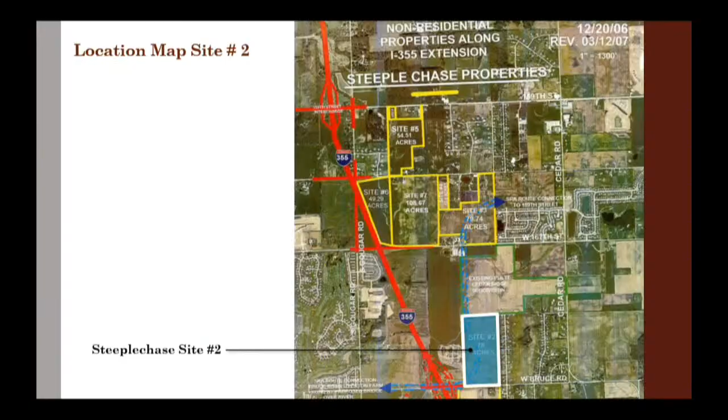The item went before the Plan and Zoning Commission at their regularly scheduled meeting on October 8th, 2024. Questions came up from the public related to the size of the lots and the interior of the development having a different character than the neighboring residential lots. I'm going to pull this up.

Two density concerns: the area has a history of major flooding issues, and one resident claimed the water table is abnormally high in this location, with substantial flooding occurring often. There was concern for additional cars on Bruce Road and at the intersections at Cedar and Gougar, and residents asked for more open space and had questions about the number of school-aged children being introduced into the area schools and district. A commission member also had questions related to the price points of the housing and the zoning, getting confirmation on that, and the importance of housing diversity to people interested in coming into town.

Five of the seven commissioners were present and voted 3-2 to recommend approval of the concept plan. Subsequent to the Plan Zoning Commission meeting, staff identified a series of answers to questions asked either by residents, by commissioners, or by emails we got from various residents after the meeting. I'm going to go through a number of those components, but I want to walk through the plan itself that you see on your screen.

A lot of the numbers are on the left side. The site data shows the number of units for each type of property. So the single family, what we have termed small lot, which would be the 43 by 120 properties, there are 106 of those on this plan. Then the single family 65-foot wide lots by 120 and 75-foot by 120.

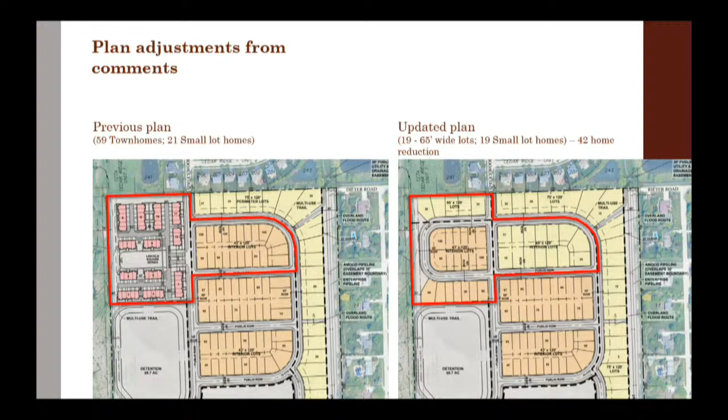There were already all single-family lots along the east edge, so there weren't any modifications related to that, with the exception of one minor modification that added 2 homes along the south section, south of where the Ron Court right-of-way is. Those changed from 75-foot wide lots to 65-foot wide lots, so that was an addition of 2.

But again, the home type between the 65 and the 75 foot is no different. It's the exact same home that you would find on both. And again, you can drive through Silo Bend, and both of those home lot sizes are in Silo Bend.

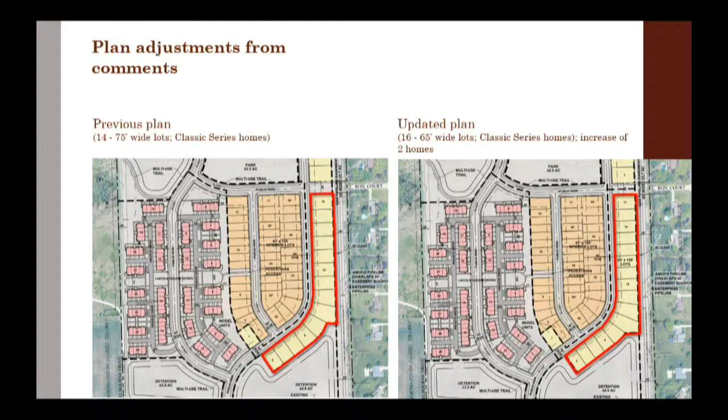Some other contextual information, the zoning I mentioned before, the 2009 annexation agreement allowed for the 3 different zoning categories tied to an active adult community. There was the reversion provision that I went over before, that if a successor owner, which is what MI Homes would be, proposes a plan that's not specific to an active adult senior living, the property would be considered as an existing R1 zoning property.

Plan comparisons: what you see on your screen is the original Steeplechase Site 2 plan. This one had 61 or 81 6-unit townhomes, those are in the blue on the left side of the plan. They had 88 duplex units, primarily in the middle of the plan, and 97 small lot detached single family, which is throughout the remainder of the plan. Total unit count of 266 units.

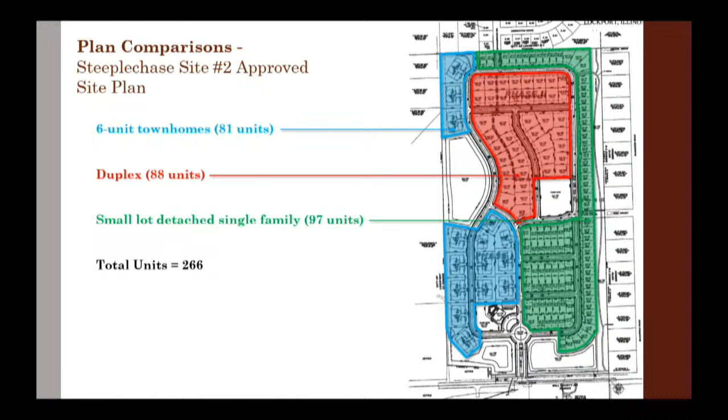Park is generally in the same area as what we have it on the Sadie Ridge plan. It's about 2 times the size on the Sadie Ridge plan than what it was on the original Site 2 plan. Just as a comparison as far as things that were included in it, both plans include small lot detached single family homes.

The square footage sizes are shown on your screen. Both plans include townhomes of up to 6 units per building. Both plans include bike paths and connections to Cedar Ridge's paths, although the 2024 plan includes about 2 times as many trails in it as what the original plan did.

Both plans include a roughly 2.5 acre park that would be accessible by both the Homer Glen residents to the east as well as Cedar Ridge residents to the north. Both plans include a right-of-way connection but no street to Ron Court in case the school site develops.

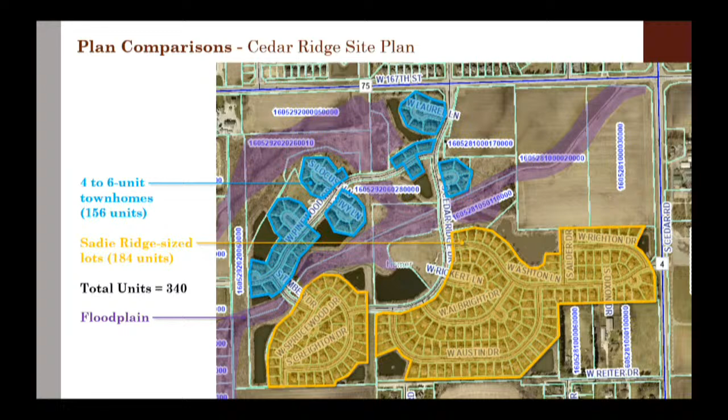These are some comparable architecture examples, and I want to be clear on the architecture components of it. The council does not, as a part of this resolution, approve architecture as a component of it. We only approve the concept site plan. So these are comparable to show what the intention is to build on something like this.

Once we get through a concept plan at a staff level, taking comments from city council as well as plan commission members and integrating our design guidelines and material standards, we go through with the developer and develop a number of different ways to approach the architecture. As you might imagine, we've gone through that on a fairly significant basis in Silo Bend for the classic home series, which is what you see on your screen primarily. We did a fair amount of work on that. It had 6 different model types with 6 different elevations each, offering 36 different ways to approach the architecture. So that was included.

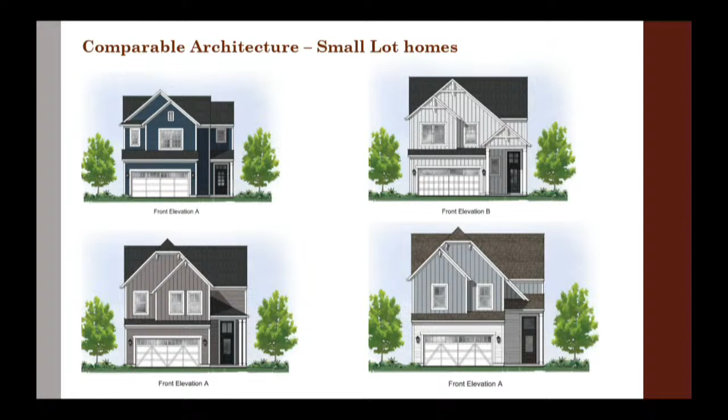The small lot homes, these are shown as a comparable image to what could be there for the small lot home. And for the Lincoln Square townhomes, this is a comparable image for what could be done there. But again, all of this will get filtered through both your comments as well as our design guidelines, design standards, and exterior material standards that we have codified.

Related to the schools, note that this particular property, the Sadie Ridge property, was included in the demographic forecast developed by McKibben Demographic Research Associates in 2021 that LTHS did on behalf of the feeder districts and themselves. What you see outlined in red are the student counts, projected counts for both Homer 33C as well as 205.

What you'll notice primarily in 205 is there is a relatively significant decline of students that is projected, bottoming out in about 2028, 2029, down to about 3,304 students. As I've talked with Dr. McBride and some other senior staff members at LTHS, these trends are tracking nearly exactly to the person what was forecast at the time. So our actuals are turning out to be real.

I also had a conversation with the superintendent at 33C to get a better understanding of whether their numbers are also tracking with these. Their numbers are, for sure, so they are seeing their student populations decline slightly, but what they wanted to make sure I noted for all of you is that their student type has changed. Through the pandemic, and it's happened at the high school as well, there have been a lot more IEP special needs kids that have come out of the pandemic because of all the stuff that happened with that.

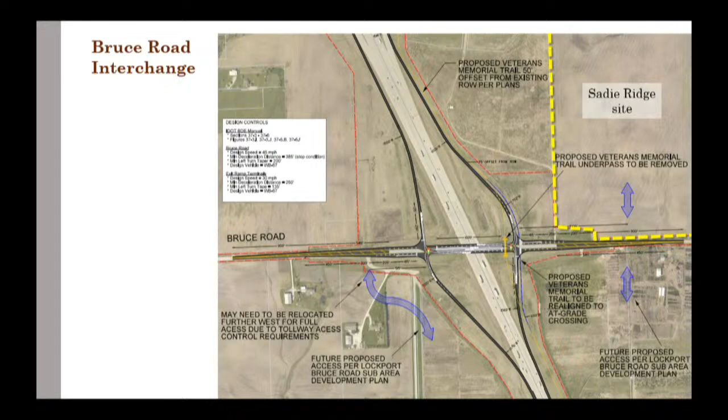As I pointed out on the earlier plan, that middle alignment was an effort that had gone pretty far down the road, not full design documents, but they were advancing it. As I've talked with some of you, think back—we didn't even have the tollway 15 years ago. It was non-existent, and Gauger Road was still a chip and seal two-lane road, and so was 159th Street. So if you think about the pace of change in our infrastructure since that point and the dramatic changes that's made, this is certainly something that, although not funded currently, could be in the future—whether it's part of another development proximate to this, or part of a new bridge plan that resurrects itself since it was put on the shelf a couple years ago.

I wanted to put that out there so everybody had a sense of what that looked like. From a traffic standpoint, a traffic study is not required during the concept plan phase of the project, but it will be a significant part of the final development plan phase.

We do that for all of our projects, and all traffic studies are reviewed by a third-party consultant that reviews it on the city's behalf, not on the developer's behalf.

We heard a lot from the residents as well as the plan commissioners related to the Gauger-Bruce Road intersection, as well as the Cedar Road-Bruce Road intersection. Working with Will County, we will be a major part of that effort. We worked with Will County for the Silo Bend Division Street because they have jurisdiction over Division Street as well—that's why you see the dedicated left turn lanes at the entrance to Silo Bend, and the deceleration lanes at the entrance to Silo Bend. All of those components will certainly be taken into consideration and studied in great detail if this is approved to move forward into that next phase.

From a soil standpoint, we also heard the residents who live and look at the dirt every day. The developer, as is typical, isn't going to do soil borings, depth studies, and soil quality studies until they have some level of confidence that they should move into that phase and expend those funds. But it's in their best interest to make sure the soils have structural capacity to hold up a home. If not, they'll need to either walk on the project or amend the soil in some fashion to support that.

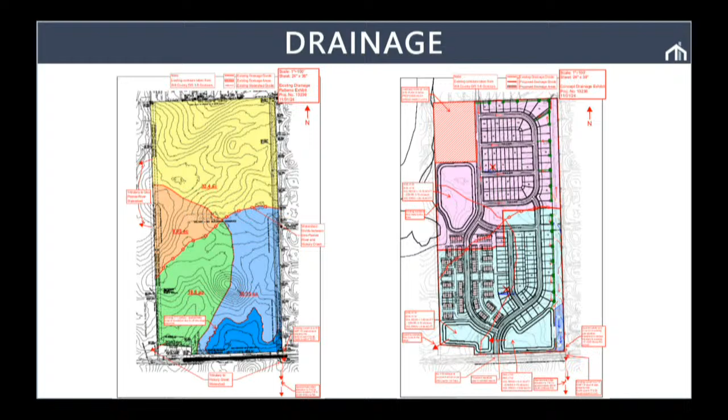Unfortunately, this 1987 subdivision was specifically designed to accommodate water in rear and side yards of homes west of McCarron Court. There is no consolidated detention basin like we're proposing in Sadie Ridge. In Colonial Acres, stormwater management occurs in the yards of individual homeowners - that's how the subdivision was permitted and ultimately constructed.

If we pulled up county GIS contours, it becomes very evident where those stormwater basins are located in the rear yards of those homes. MI Homes can't be responsible for re-engineering Colonial Acres, but we can and will provide some relief with the manner in which we engineer Sadie Ridge. By reducing the area of Sadie Ridge that is tributary to the culvert along Bruce Road by 95%, MI will materially reduce the amount of water directed at residents in Colonial Acres.

I'm going to pause on stormwater there - that's some kind of technical detail. I'm not an engineer, I like to play one on TV, but if you've got questions on stormwater, I'd be happy to address those right now.

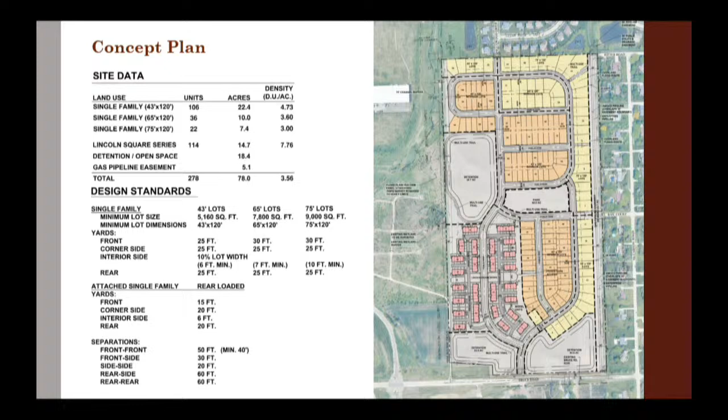Anything else? No. Joanne, what do you think? Well, I appreciated the taking out some of those townhomes and so forth, and I understand, I received an email from one of the residents stating that they are concerned for traffic going through the neighborhood. I'd like to talk about that a little bit more so the residents can hear. The concern was density,

and let's see, something else here. Concern, I'm sorry, speed. Yes, the speed table, people driving through the neighborhood. I did talk briefly with Lance in reference to cars going through neighborhoods. In a sense, I think everybody can take advantage of the cars going through, and there's going to be more like three exits and entrances to the subdivisions, and they are going to be going through Cedar Ridge and Sadie subdivision and one other subdivision.

So everybody's going to be able to take advantage of getting out one way or another. I think people are just concerned on the density, too many cars coming in and out of the subdivision.

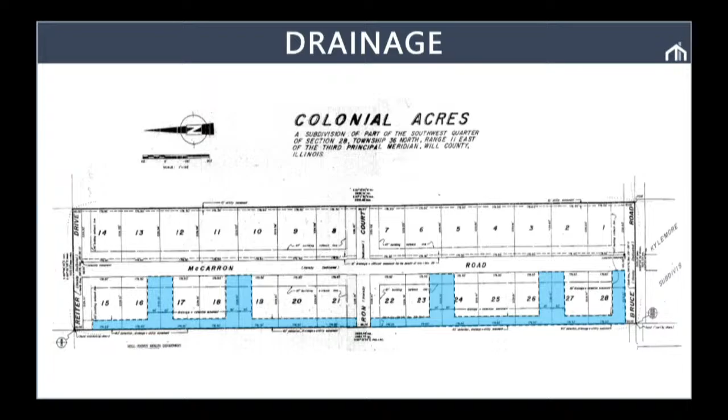I can concur with everything that's been said about the drainage, the water issues, and so on and so forth. I appreciate all of the reviews that have been done, all the hard work that has gone into this concept at this time. I'm just hoping that none of these issues talked about tonight, specifically the density, the traffic issues, and the safety issues, are going to be ignored going forward.

My biggest concern is the cooperation between and among Lockport, Homer Glen, Homer Township. It is not a secret that there are problems within Homer Glen and Homer Township in terms of getting along and communicating and doing things for the constituents of those areas. I would hope that Lockport can be the big kid on the block and take a lead on this, and keep the involvement of Homer Glen, Homer Township, the schools, Homer 33C, and also the high school.

To give you some historical perspective, when I purchased this house in 1989, my taxes were $3,300 a year. They are now $11,400. When I purchased the house, it cost me $219,000. The most recent survey we've had, comps are probably in the neighborhood of $475,000 to $550,000 for this house. It's about 2,900 square feet.

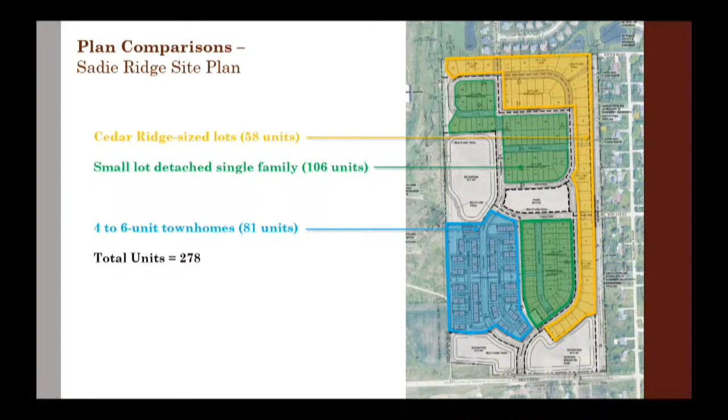Cedar Ridge is right above the yellow, and each of those is a single lot. So we're going to have a single street of homes with lot sizes like ours, and then right away it goes to small homes in the green. I don't think that's enough. If we're going to have that lot size, I don't think they should be that close to Cedar Ridge at all.

And then the last point was about traffic through Cedar Ridge. What I thought I saw is that it's supposed to go through Sprucewood and then they can go directly to Cedar Ridge Drive to get to 159th Street, or Pinewood. I live on Cedar Ridge, on a corner, and I can tell you that. I live across from the park. We have several bus stops on that street.

I have 4 college-age kids. When they are all home, we are constantly telling them, look sideways, look behind you, make sure there's no little children, because there are so many young kids running around. They've gotten so used to it, you can't pull out of the driveway without looking a million times. I can't imagine more traffic going through the subdivision, because there are bus stops where there aren't adults able to be there, just a group of kids together, or the adult is down the street with the baby, watching from their house. So I don't understand why these subdivisions have to be joined at all. That's my opinion. Thank you.

And then lastly, Stephen.